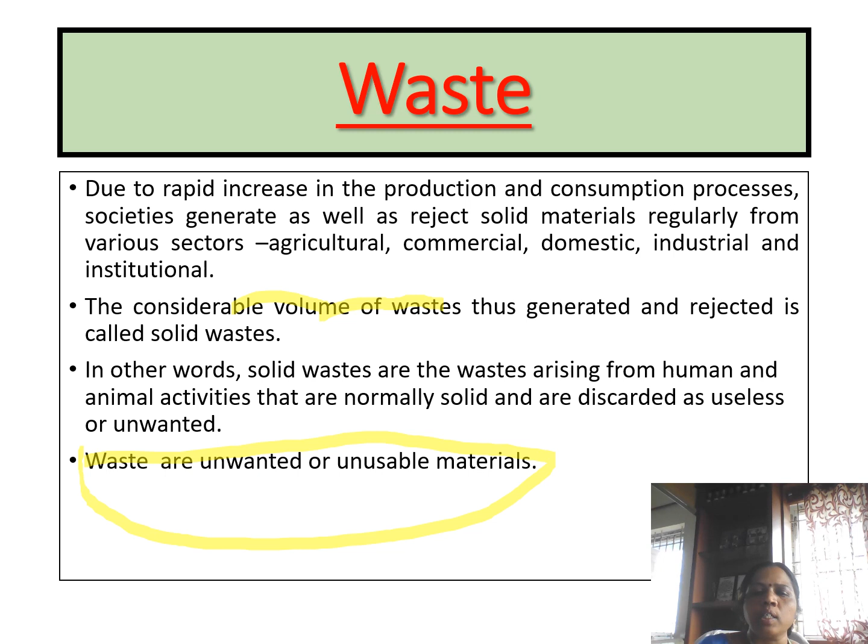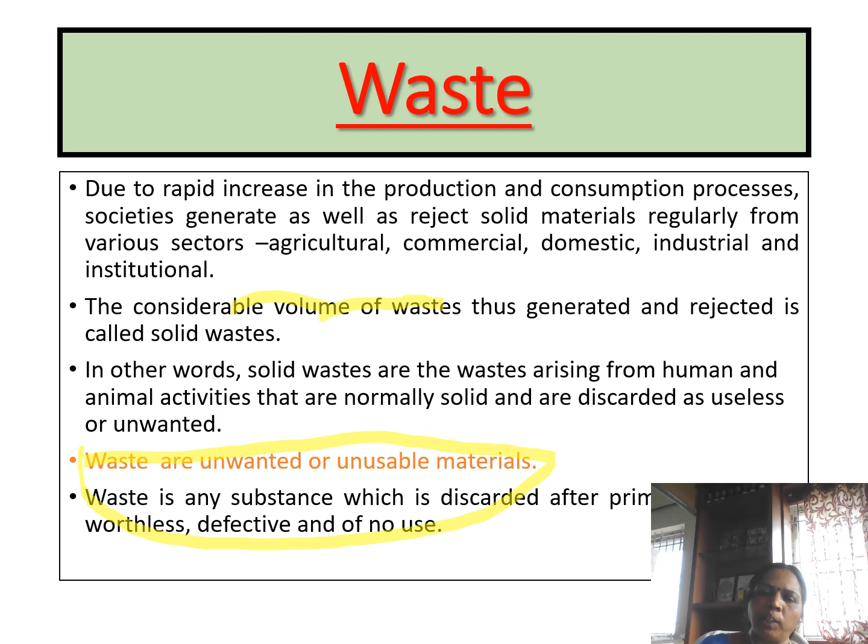Initially we buy one object, and after a few days, years, or decades, that object may become obsolete and a new object may enter the market which we all like to purchase. So the older one you are possessing becomes waste - we are not really going to use that anymore. It has become waste, which is unwanted or unusable material. So it is any substance which is discarded after primary use, or is worthless, defective, or of no use. That is called waste.

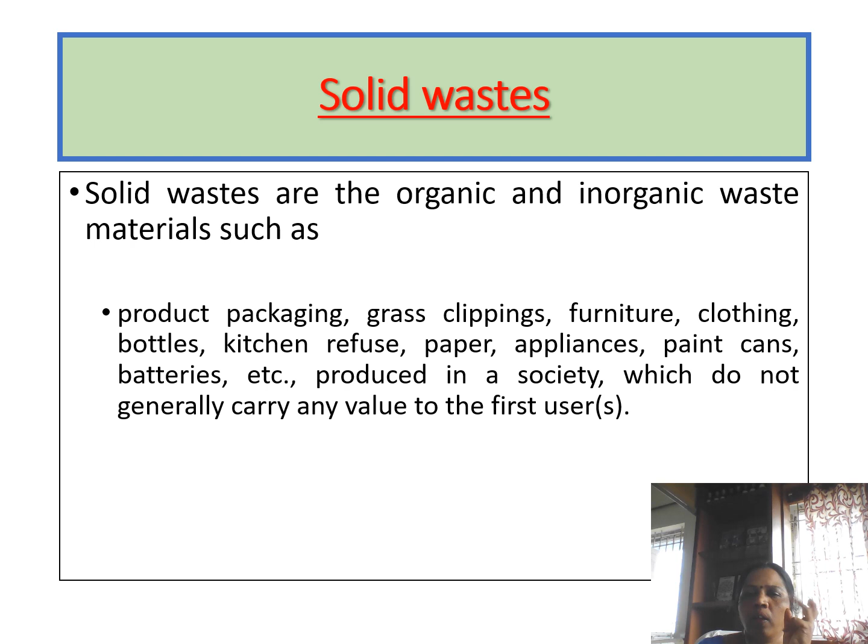So for solid waste, we must know the various kinds and sources. The sources of solid waste are agriculture, domestic, industry, and so on. Solid waste includes organic and inorganic waste materials such as product packaging, grass clippings, furniture, clothing, kitchen refuse, appliances, paint cans, and batteries, which are produced by society and do not generally carry any value for the first user. Those are said to be solid waste.

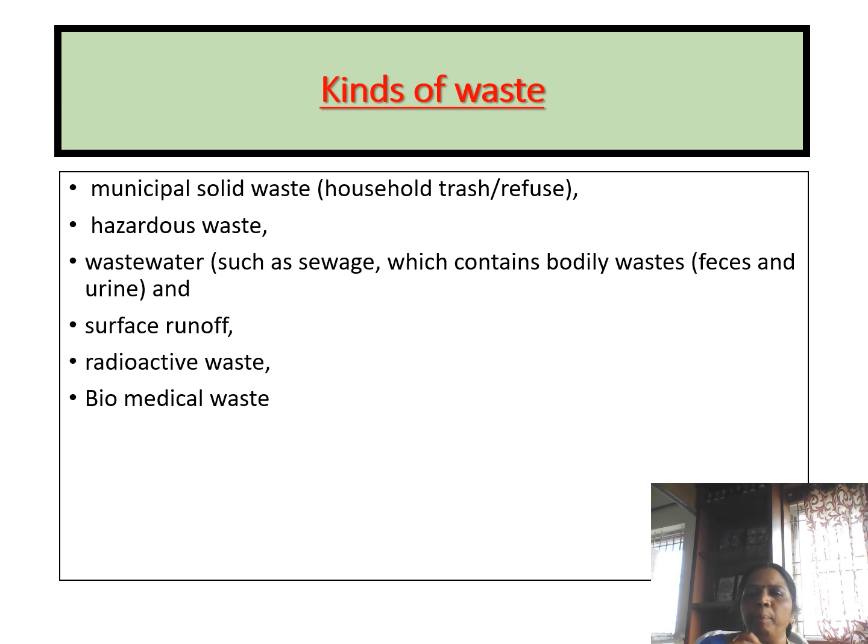Next, we'll enter the topic of kinds of waste. There is municipal solid waste, which is household trash and refuse; hazardous waste; and liquid waste such as wastewater and sewage, which contains body waste including fecal and urine waste. Then surface runoff, and we have radioactive waste, biomedical waste, and so on. These are the various kinds of waste which you and I will encounter day by day.

Municipal solid waste has a special name in various countries. It is commonly known as trash or garbage in the United States, and rubbish in Britain. It is a waste type consisting of everyday items that are discarded by the public. That is called municipal solid waste.

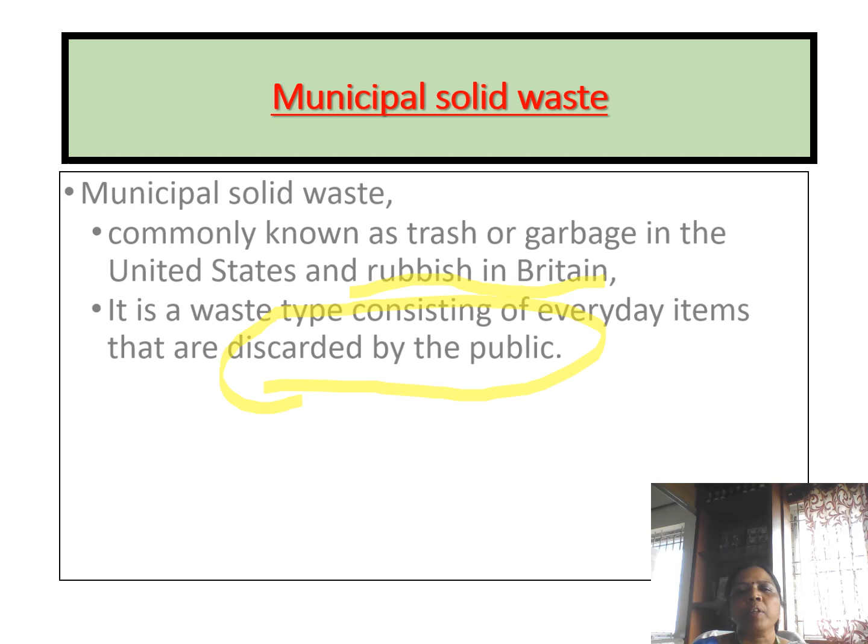For solid waste in India, we must understand how much waste is generated periodically. Around 7.2 million tons of hazardous waste is generated in a year, and around 1,600 crores has been allotted for the treatment and disposal of this waste. Imagine how many crores we are allocating for this purpose alone.

Every day the landfill area keeps increasing, as this solid waste is discarded in landfills, so the landfill need has been increasing day by day. Apart from 7.2 million tons of hazardous waste, industries are also discharging 150 million tons of high volume low hazard waste every year, and that is mostly dumped in open low lying land areas.

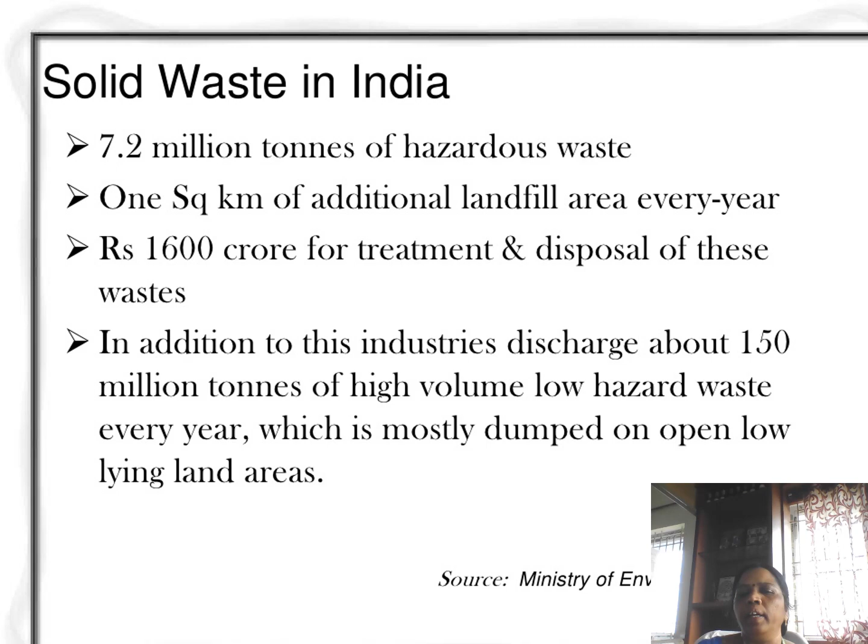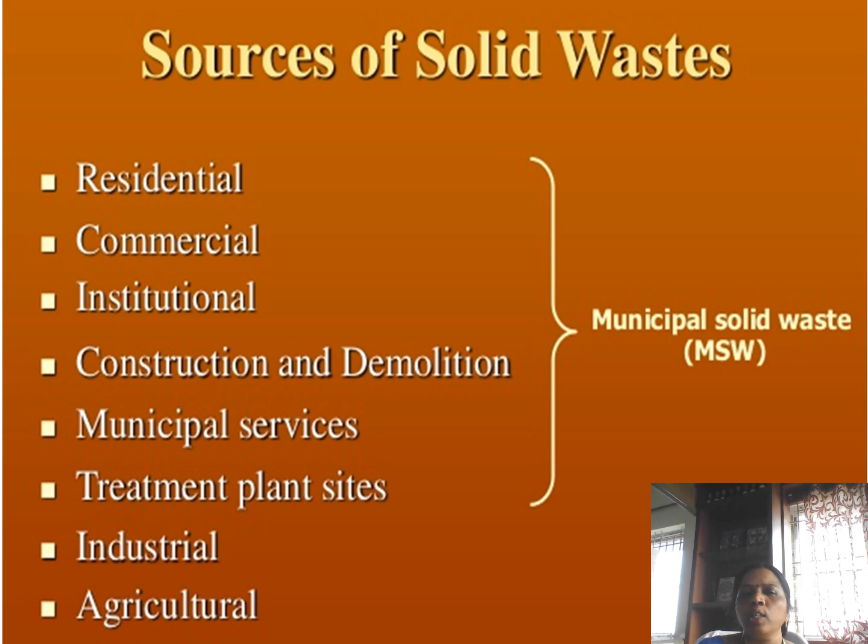Next we'll get into the topic of sources of solid waste, which I already told you in the first slide. In depth, we are going to see the sources from where solid waste is generated - they are from the agricultural area, the industrial area, the commercial area, and so on.

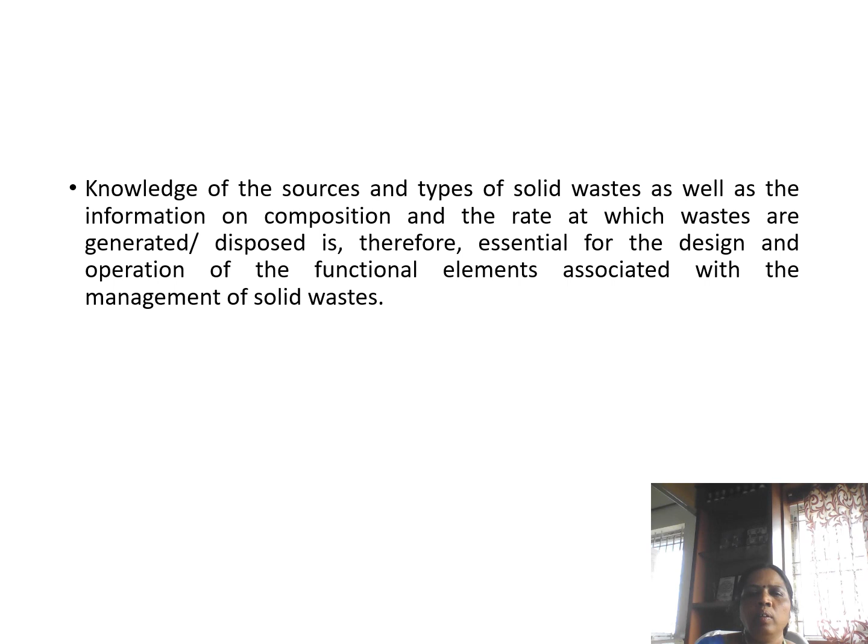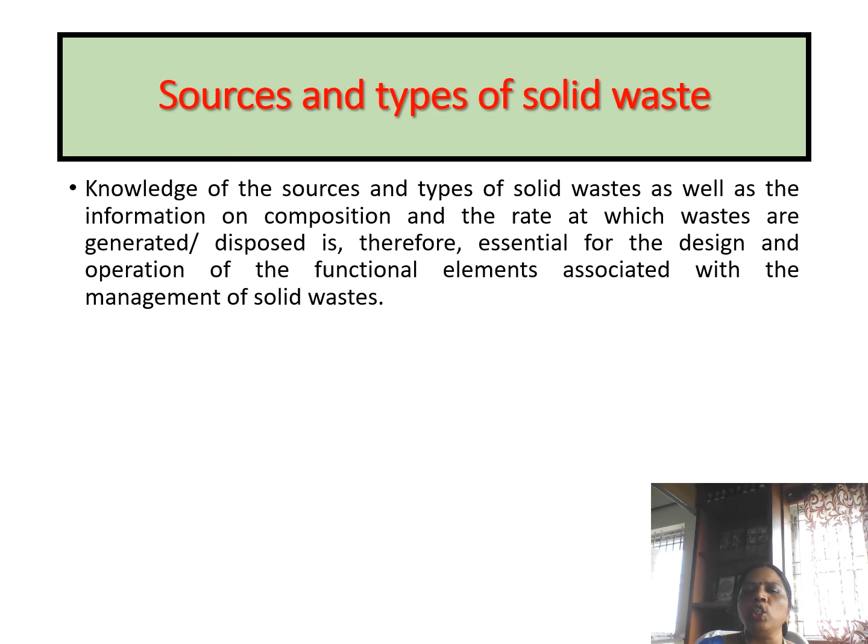The knowledge of the sources and types of solid waste, as well as information on composition and the rate at which waste is generated, are essentially required for the design and operation of the functional elements of solid waste management.

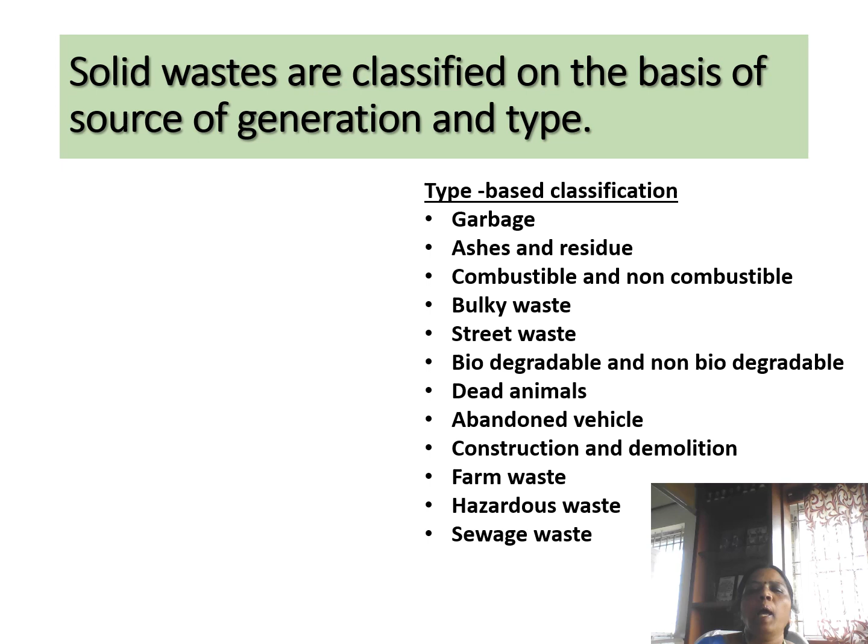The solid waste is classified on the basis of source of generation and type. Based upon the type, it is classified into garbage, ashes, residue, bulky waste, street waste, biodegradable and non-biodegradable, dead animals, abandoned vehicles, construction and demolition, and so on.

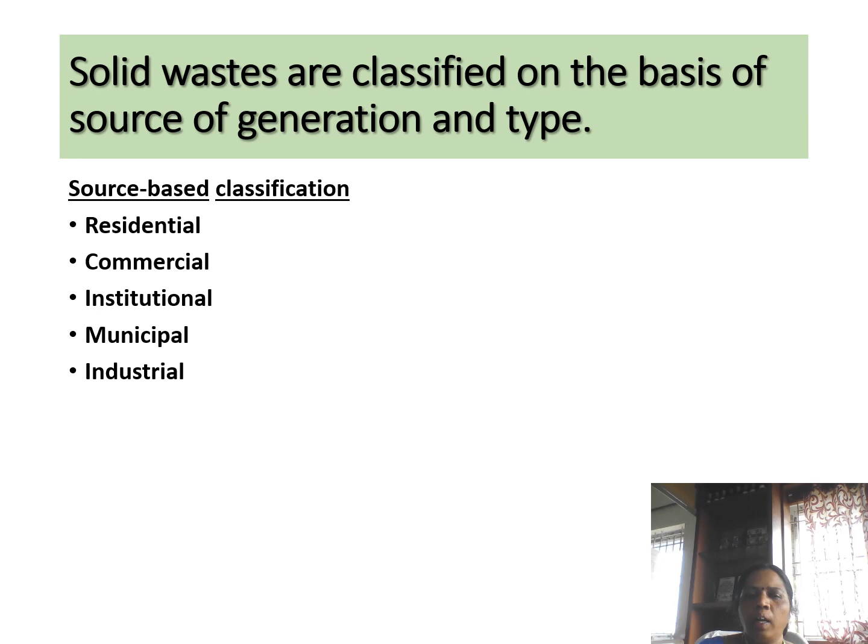Next, based on source, it is divided into residential, commercial, institutional, municipal, industrial, agricultural, and even open areas. Based upon the degradability nature of the waste, it is divided into biodegradable and non-biodegradable.

Examples of biodegradable waste have been listed here: paper, cotton, cloth, woolen items, and wood. Whereas non-biodegradable items consist of aluminium, tin, plastic bags, glass bottles, etc.

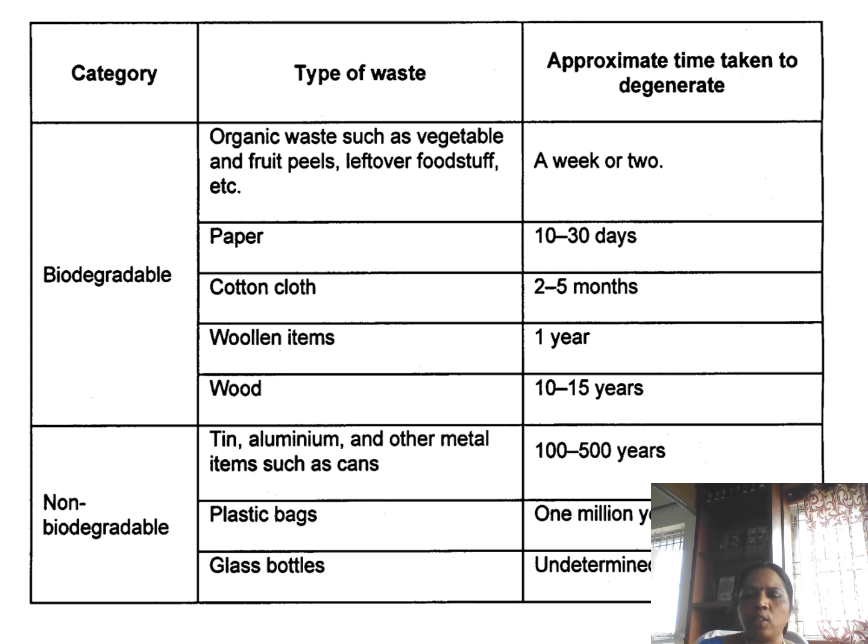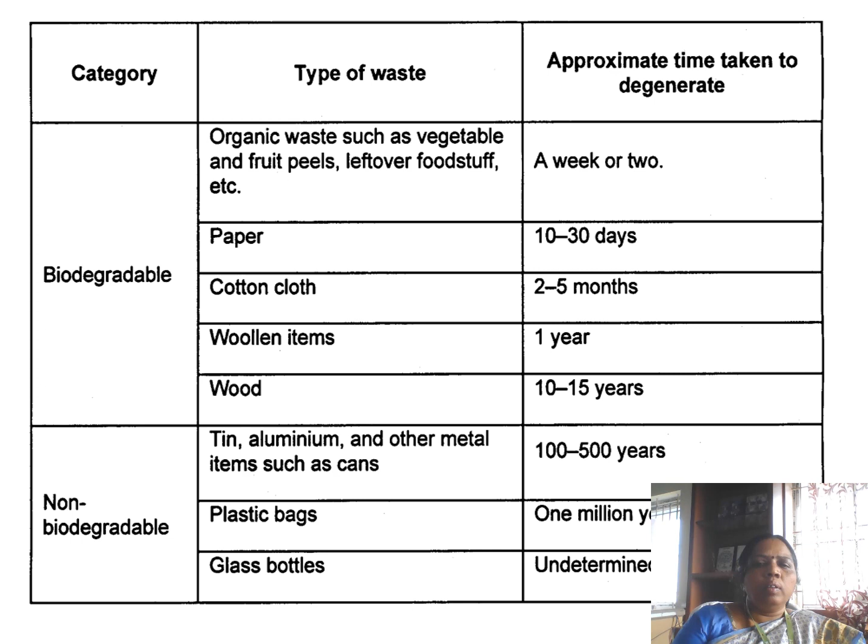Then coming to the typical waste generators from the various sources, such as single and multi-family dwellings and commercial areas, institutional and municipal services, and so on. So the list will be lengthy as we go on through the various types of typical waste generated from every source.

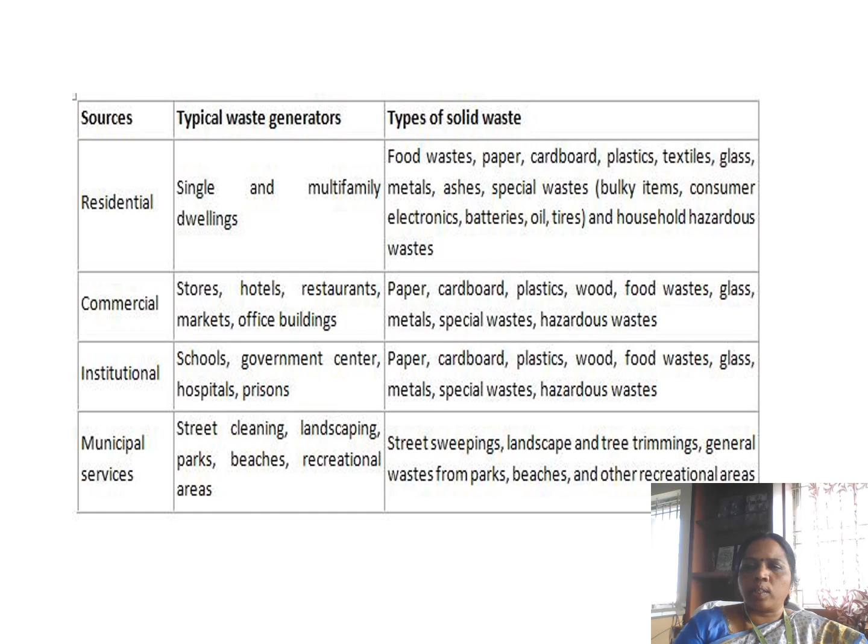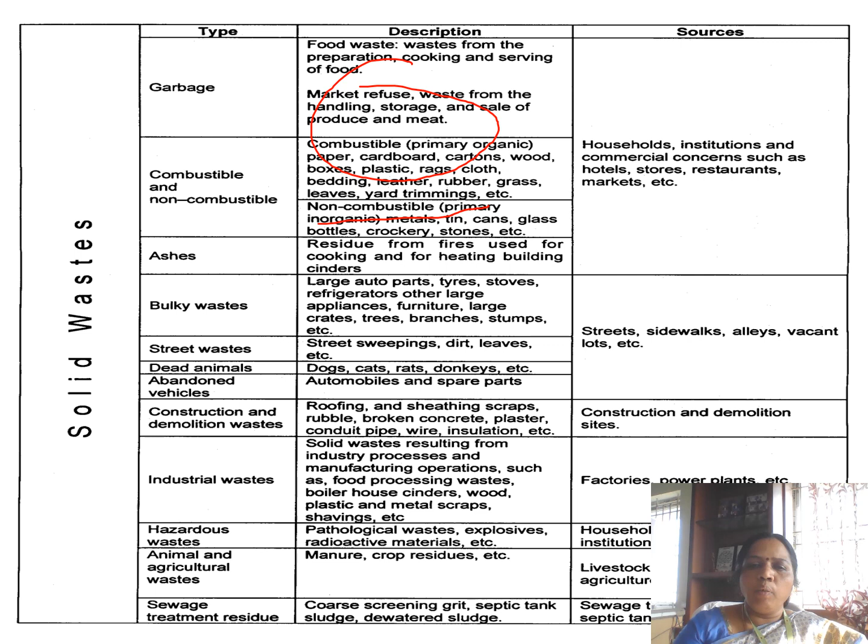Combustible and non-combustible waste. Then we have bulky waste, that is large auto parts. Then dead animals, automobiles and spare parts. C&D, construction and demolition waste, otherwise called C&D. Then waste from industries, hazardous waste, manure, and so on.

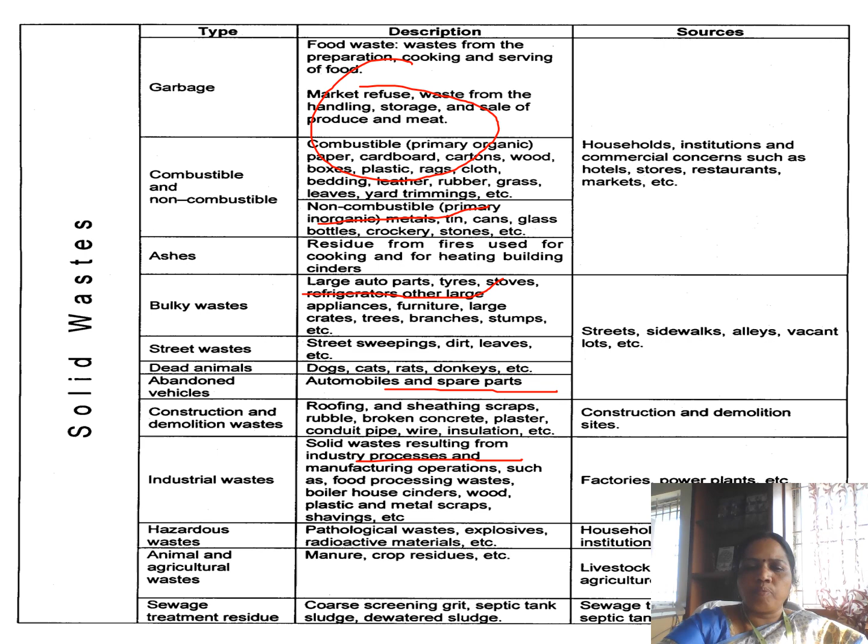When we talk about hazardous waste, we must understand what this hazardous waste is meant to be. If the waste has any one of the following properties, then that kind of waste is called hazardous waste. It can be either reactive, toxic, or corrosive, and it can be highly dangerous to living beings.

Next, this is the record of the waste that is generated by various cities in India. I have given some few examples of various cities which generate waste, and per capita.

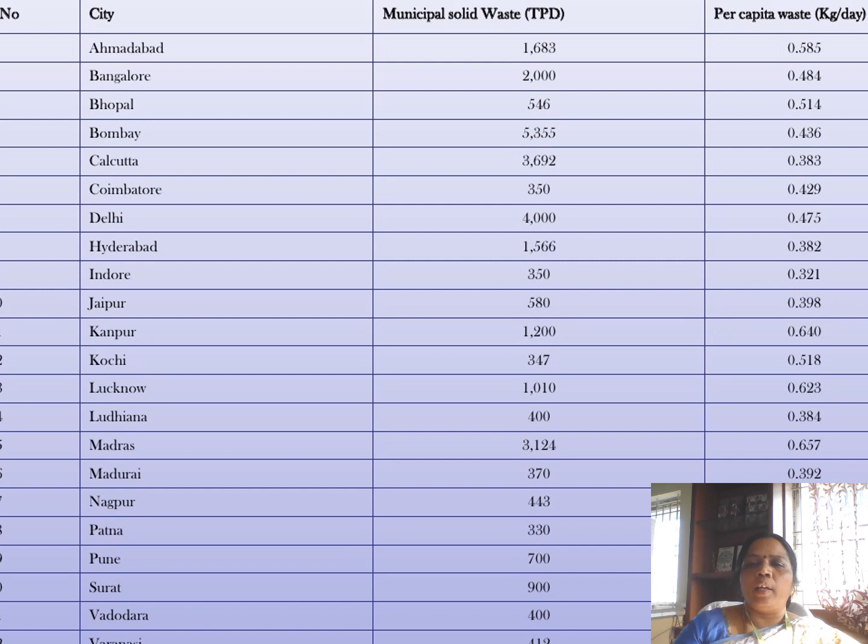All this solid waste which is generated by us will be regulated by some ministry, and that ministry is nothing but the Ministry of Environment, Forest and Climate Change. And we have the urban local body also. Apart from that, all these rules and regulations have been scripted into a manual called the CPHEEO manual. It's a book which tells you about various norms any particular group of citizens or a group of people or an industry or a corporate or commercial people should follow.

So this urban local body constitutes the municipal corporation, the municipal council, and the Nagar Panchayat.

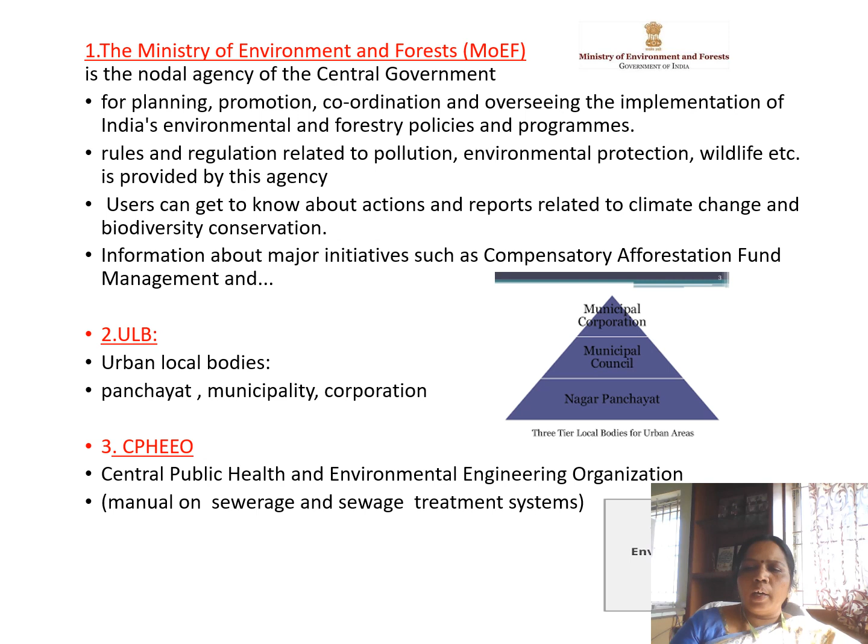When the waste has been generated, the property of that waste must be found out. That is called characterization of waste. And to find out the property of the waste, all the waste cannot be taken as such.

In the previous slides, I have shown you how much waste is produced per person, per city, per day. So it is tons and tons of waste. All those tons of waste cannot be taken into account for a property study or characterization study. So among that waste, a sample is taken, and that sample undergoes a characterization study.

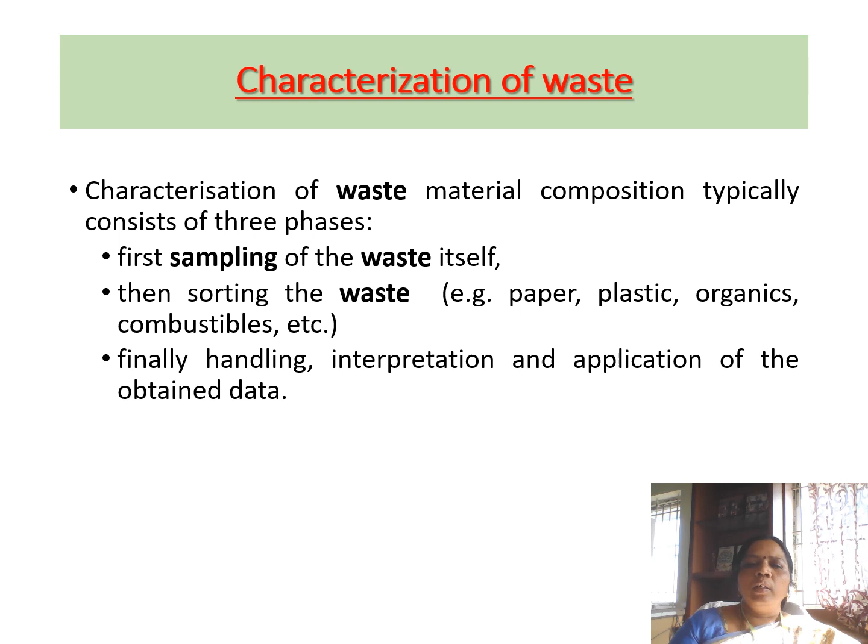So that small sample can be obtained by many methods, called sampling methods. They may be sampling at the source or sampling at the disposal site. A sample is nothing but a small group which is the representative of the entire mass, and it is known as a sampling method.

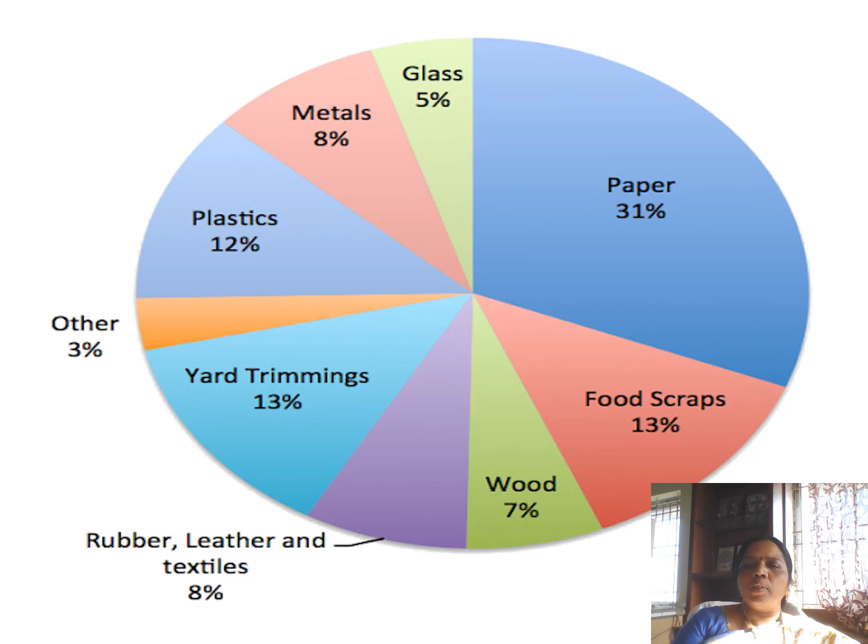Next, we are going to see the composition of the solid waste. If tons and tons of waste are generated every year, what exactly are the products that are there in the solid waste? They are glass, paper, food scraps, wood, yard trimmings, rubber, leather, textiles, plastics, metals, glasses, and many other materials. So this is the composition of the municipal solid waste.

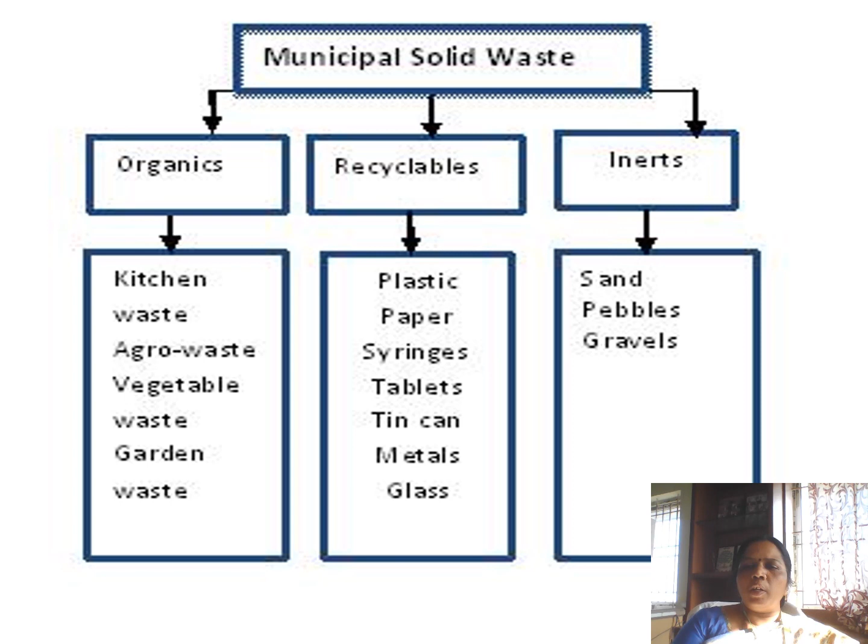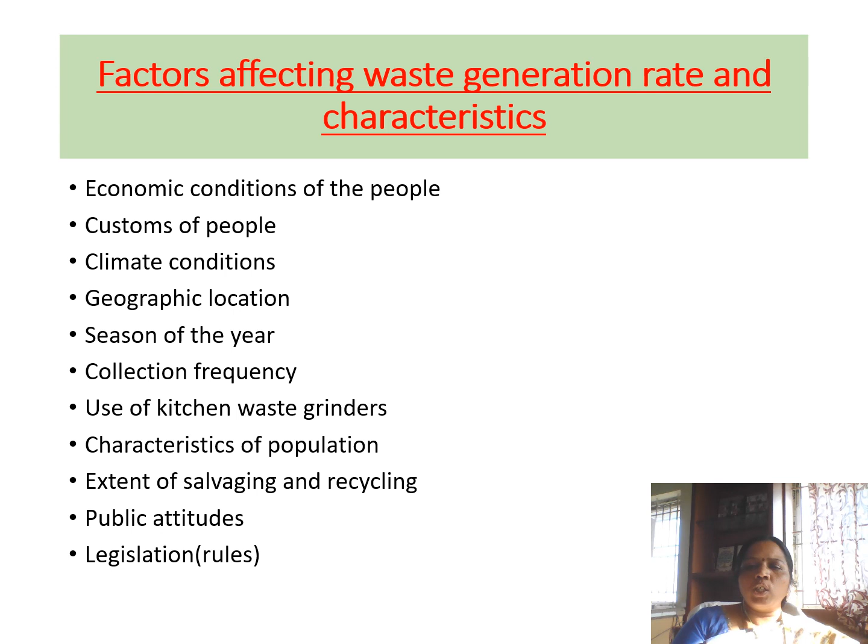Organics, recyclables, and inert materials all together are called municipal solid waste. This municipal solid waste generation will differ from place to place, and there are some basic factors which affect the generation of solid waste. They are economic condition of the people, customs of the people, climatic condition, geographical location, season of the year, collection frequency, use of kitchen waste grinders, characteristics of population, extent of salvaging and recycling, public attitude, and legislation and rules in any particular area. So, based upon these factors, the solid waste generation may vary.

You must understand what is integrated solid waste management. Now, coming to the part of waste management, so far in the previous slides you may understand what is the kind of waste, what do you mean by solid waste, what are the various types of solid waste, and what are the compositions of solid waste.

So, integrated solid waste management can be defined as a way of using a combination of waste management techniques to treat the different kinds of waste in a way which is environmentally, financially, and socially sustainable. It focuses on three R's: waste reduction, reuse, and waste recycling. It depends on the collaboration among all the organizations and individuals involved in the process.